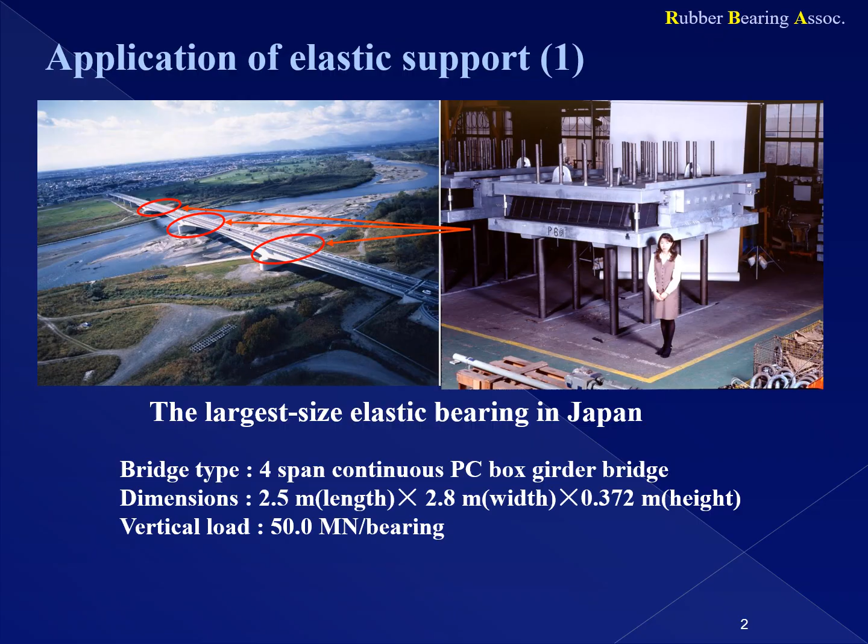This bridge is the type of 4-span continuous pre-stressed concrete box girder. This rubber bearing is classified as the largest in size, with a plane dimension of 2.5 meter by 2.8 meter, and a thickness of 372 mm. The vertical load is 50 MN per bearing.

This bridge is a type of 5-span continuous precast concrete box girder. The vertical load is about 11 MN per bearing.

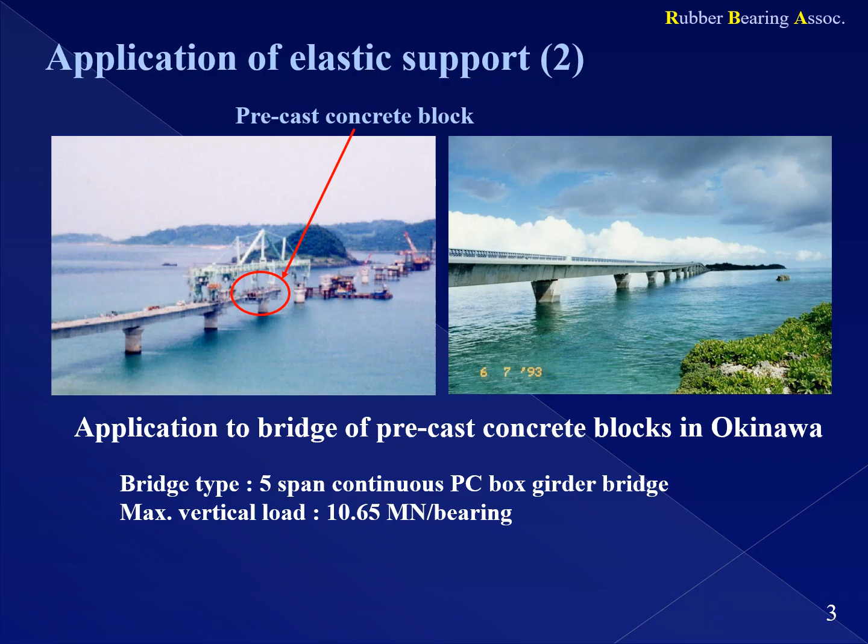This bridge is the type of 5-span continuous pre-stressed concrete box girder. The largest rubber bearing used in this bridge has a plane dimension of 1.5 meter by 1.5 meter, and a thickness of 360 mm. Vertical load is 21.4 MN per bearing.

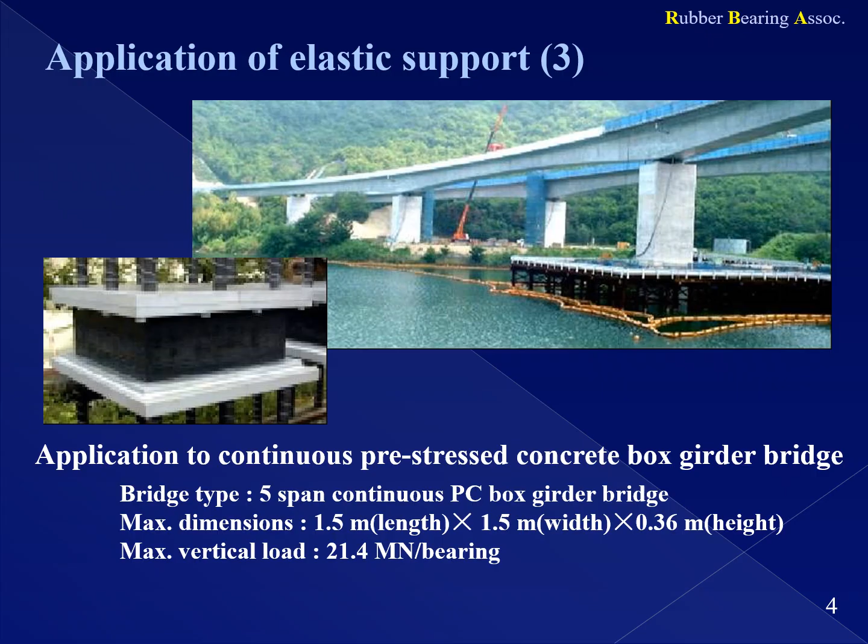This bridge is the type of 3-span continuous pre-stressed concrete box girder. The largest rubber bearings used in this bridge are used two bearings side by side as one bearing. The largest rubber bearing has a plane dimension of 1.5 meter and 1.0 meter and a thickness of 240 mm. Vertical load is about 20 MN per bearing.

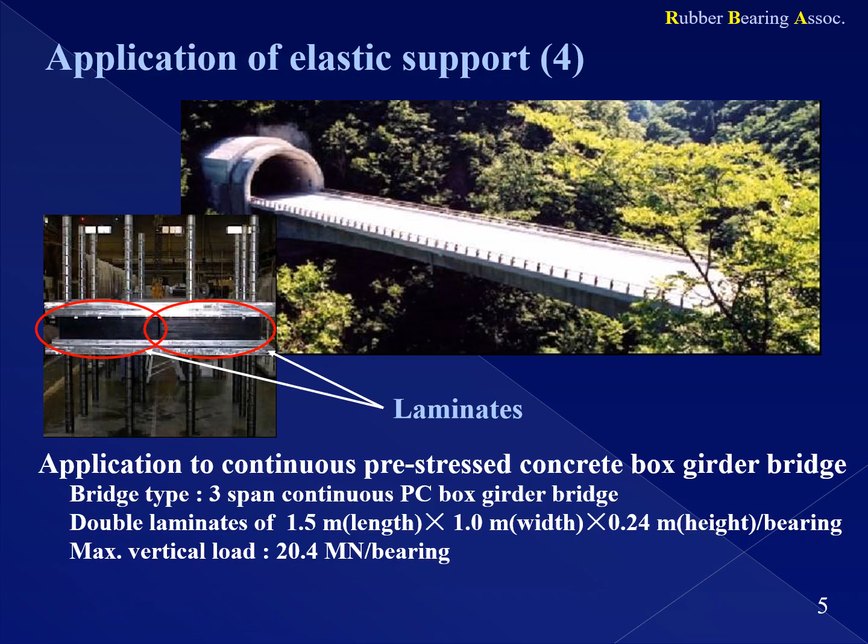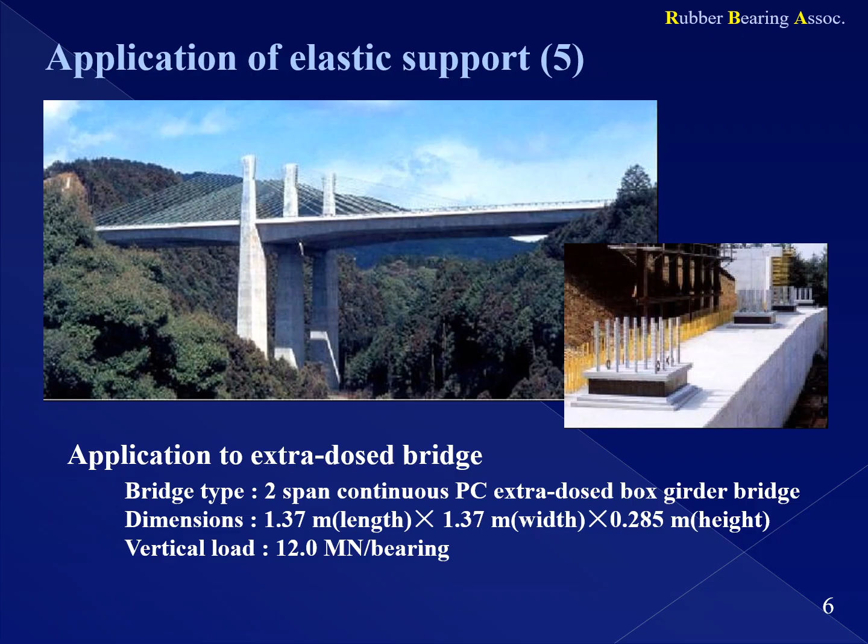This bridge is a type of 2-span continuous pre-stressed concrete extra-dosed box girder. The largest rubber bearing used in this bridge has a plane dimension of 1.37 meter by 1.37 meter, and a thickness of 285 mm. Vertical load is 12 MN per bearing.

This bridge is the type of 6-span continuous pre-stressed concrete box girder. This bridge is the first in Japan to use a seismic isolation bearing that uses high-damping rubber as the bearing material. The largest rubber bearing used in this bridge has a plane dimension of 0.9 meter by 1.5 meter, and a thickness of 270 mm. Vertical load is 7 MN per bearing.

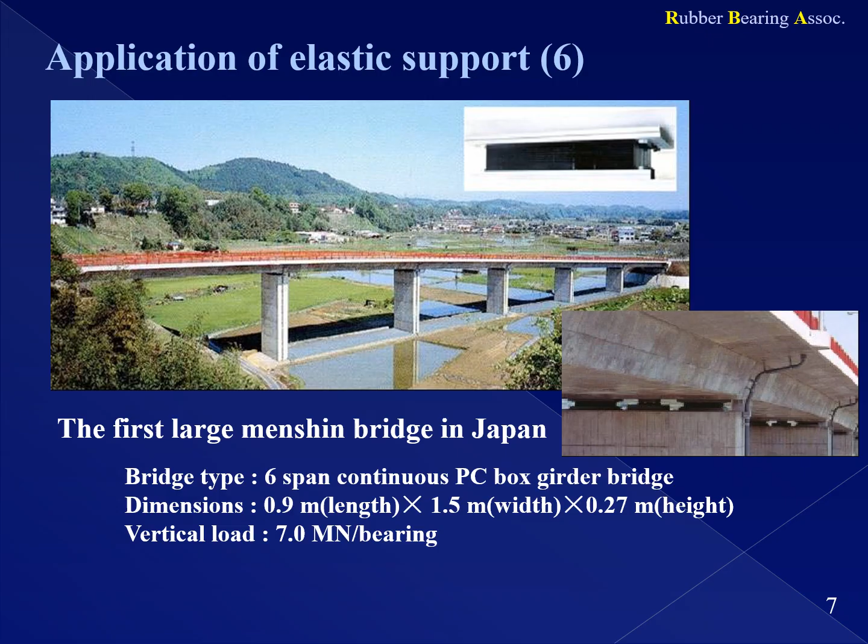This bridge is a 1-span steel arched bridge. The largest rubber bearing used in this bridge has a plane dimension of about 1 meter, and a thickness of 280 mm. Vertical load is about 8 MN per bearing.

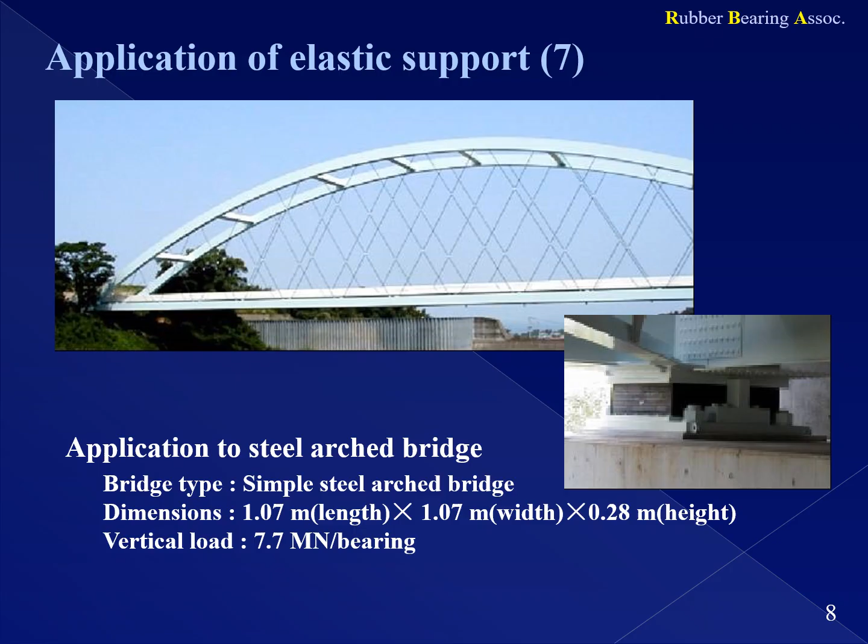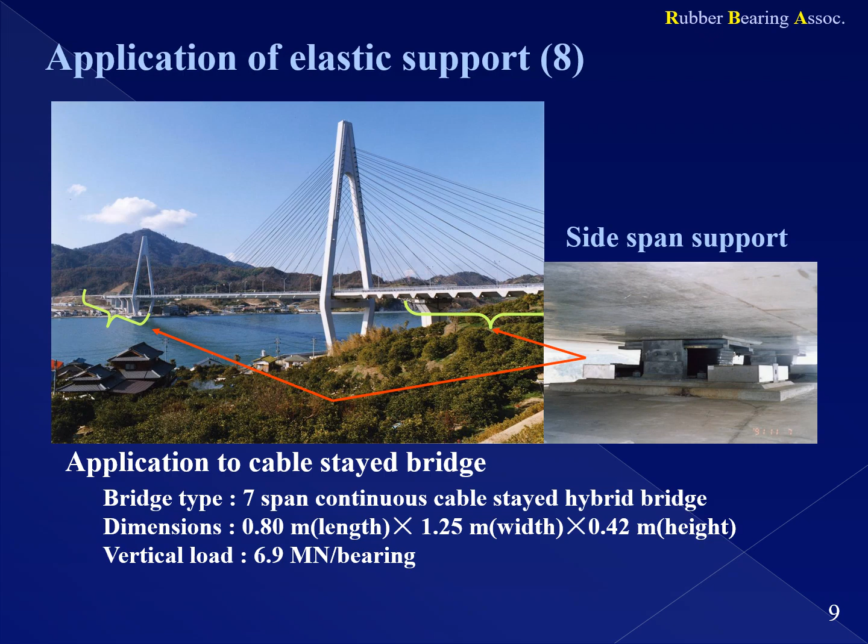This bridge is a type of 7-span continuous cable-stayed hybrid bridge. The largest rubber bearing used in this bridge has a plane dimension of about 0.8 meter by 1.25 meter, and a thickness of 420 mm. Vertical load is about 7 MN per bearing.

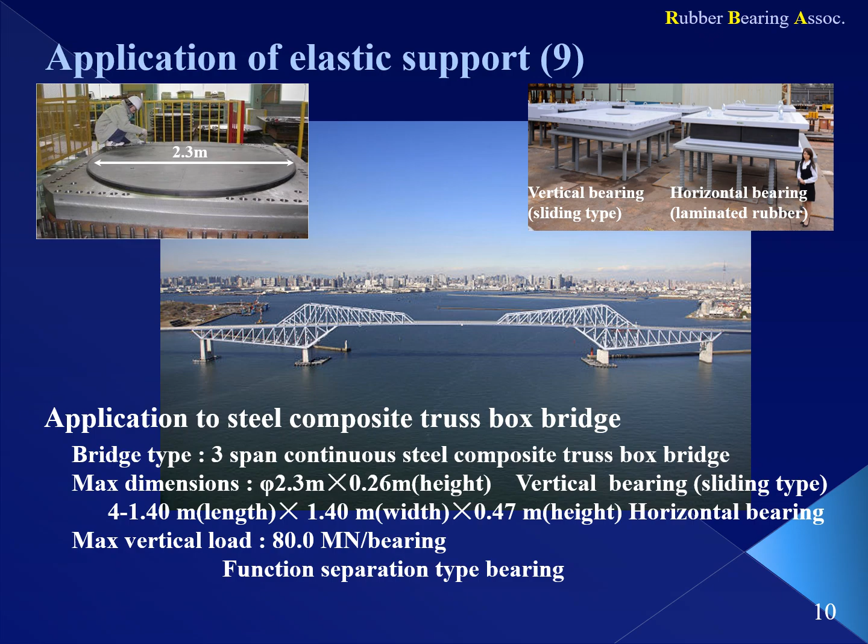In this article, we will show damage examples from earthquakes in Japan. Typical earthquakes that occurred in Japan include the Southern Hyōgo Prefecture earthquake in 1995, the Mid-Niigata Prefecture earthquake in 2004, the Niigata Prefecture Chuetsu offshore earthquake in 2007, the 2011 Pacific coast of Tohoku earthquake, and the 2016 Kumamoto earthquake.

This is a damaged example of a knuckle bearing portion from the Kobe earthquake. This knuckle bearing is a fixed bearing and corresponds to the rotation of the girder. The rotation feature became dysfunctional due to the loss of the pin support.

Due to the downward force caused by the earthquake, the girder's lower flange on the upper part of the bearing was damaged. The downward force due to the earthquake grew bigger from the rotation moment that occurred in the girder by the horizontal force of the bridge in the perpendicular direction. This downward force pushes the lower flange up and tears it down.

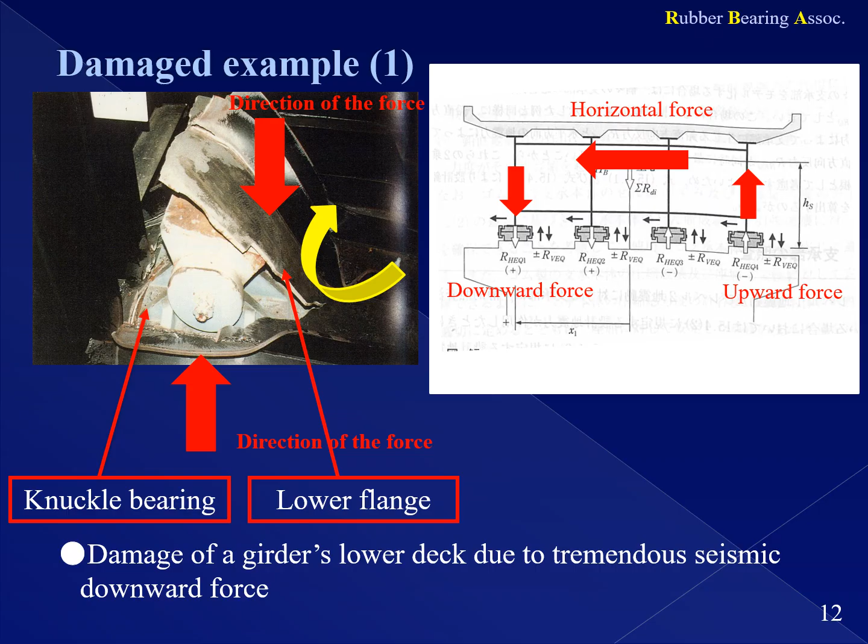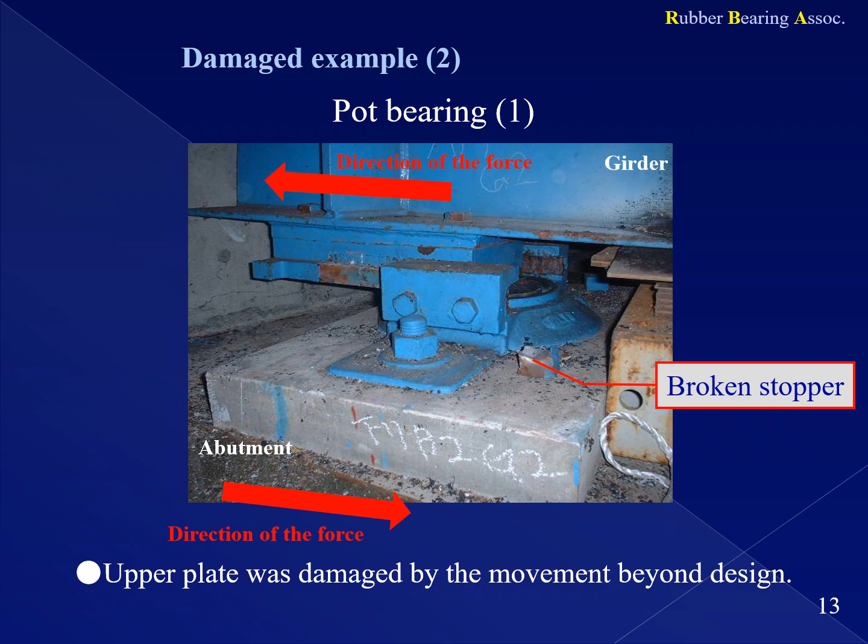This is a damaged example of the pot bearing. Horizontal force is generated by the earthquake, and the stopper portion was damaged by impact with the upper plate. You can see the parts supporting the vertical load deviate greatly. This is due to the occurrence of displacement and horizontal force exceeding the design limits.

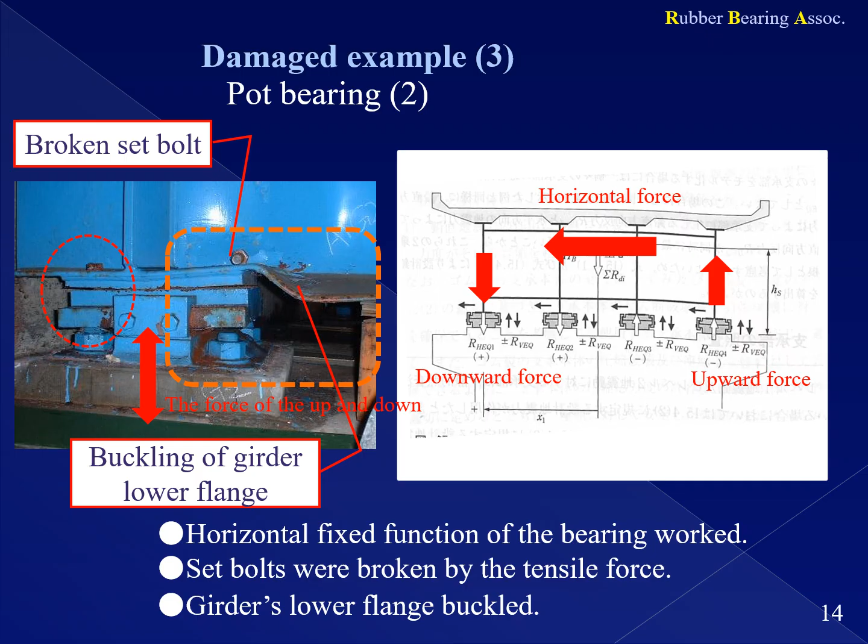Same as before, this is a damaged example of a pot bearing. This bearing is a fixed bearing. The bearing does not move because it is fixed with the side block and the upper plate stopper. However, the set bolt was damaged by the tensile force and the horizontal force. In addition, the girder's lower flange was buckled.

This is the damaged example of the knuckle roller's bearing. The pin came out of place due to a huge seismic force. The roller fell because the movement of the superstructure exceeded expectations due to the huge seismic force.

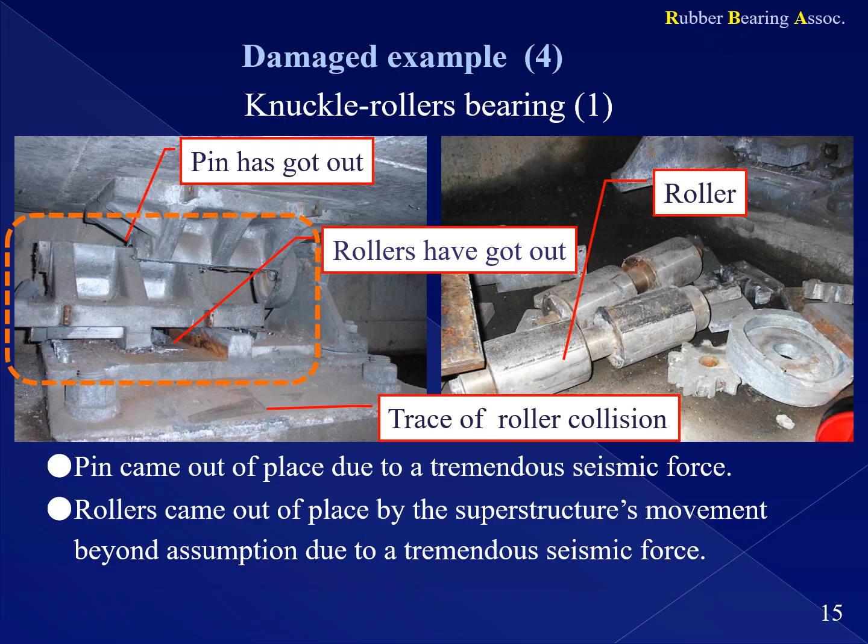Same as before, this is the damaged example of the knuckle roller bearing. Bolts were broken by the tensile force and sandwiched between the sole plate and upper plate.

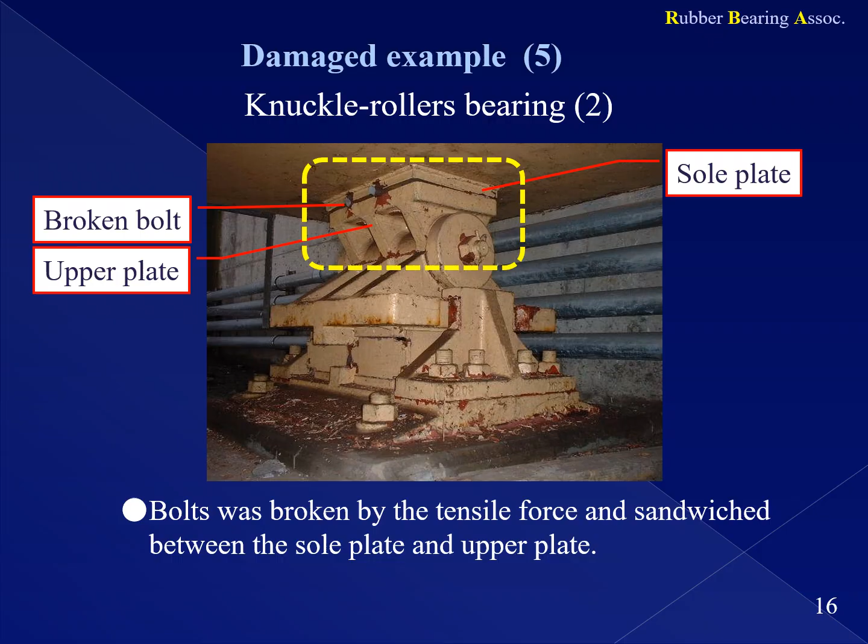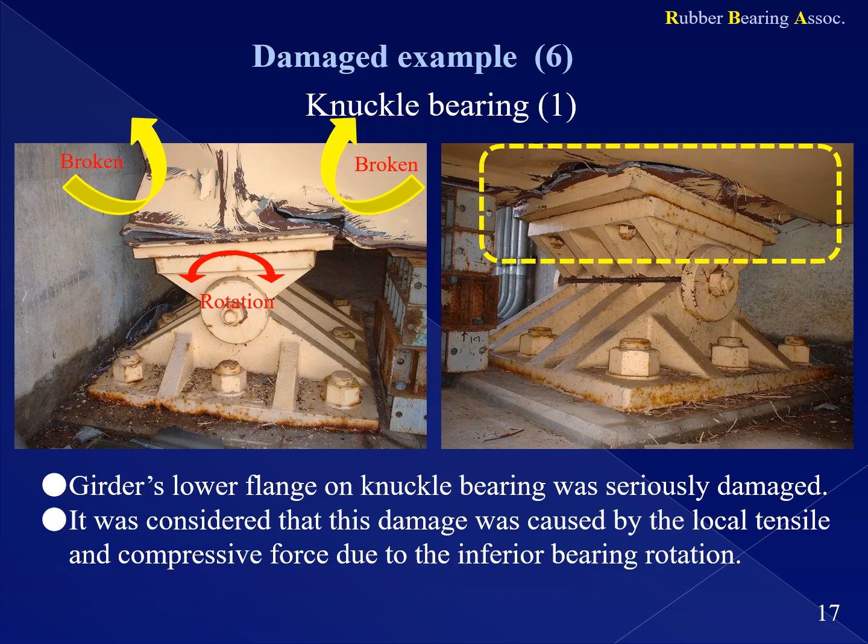Next, same as before, this is the damaged example of the knuckle bearing. The girder's lower flange on the knuckle bearing was seriously damaged. It was considered that this damage was caused by the local tensile and compressive force due to the inferior bearing rotation.

This is the damaged example of substructures with rubber bearings. This earthquake is the Chuetsu offshore earthquake. The abutment of the bridge has greatly shifted by the earthquake. As a result, the girder collided with the parapet. The parapet was damaged by the impact.

Rubber bearings were not damaged, but residual displacement remained in the rubber bearings because the substructure was greatly shifted. Rubber bearings are deformed about 150% of the rubber thickness. It has greatly exceeded the permissible value of the rubber bearing. Such a state is a very severe situation for the rubber bearing. Therefore, the rubber bearings were replaced.

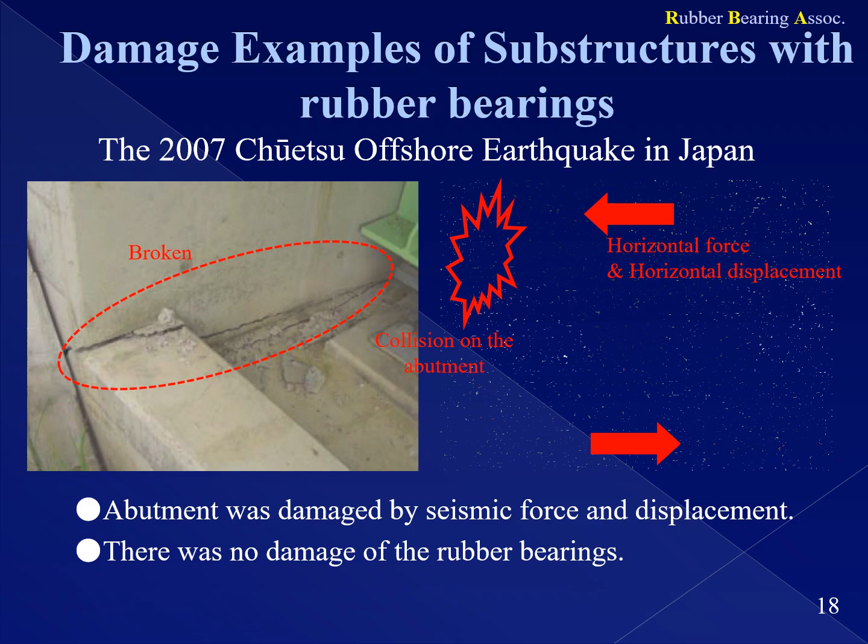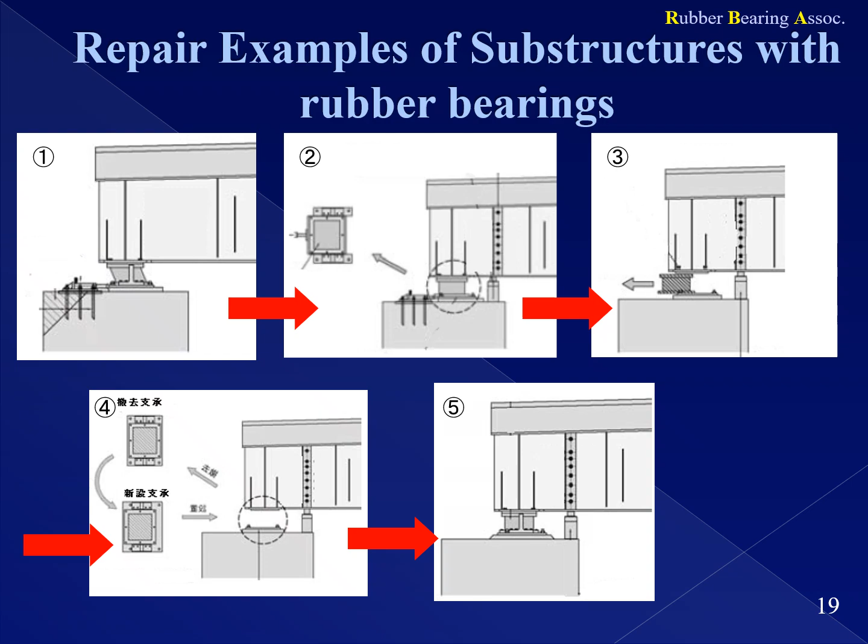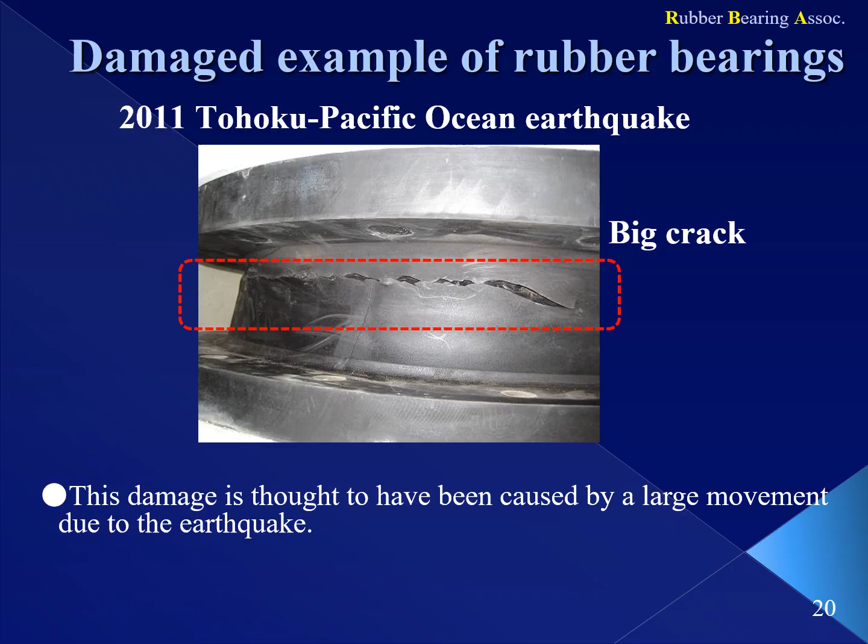This is a damaged example of the rubber bearing. This earthquake is the 2011 Tohoku Pacific Ocean earthquake. This damage is thought to have been caused by a large movement due to the earthquake. Because it was a partial break, it did not collapse.

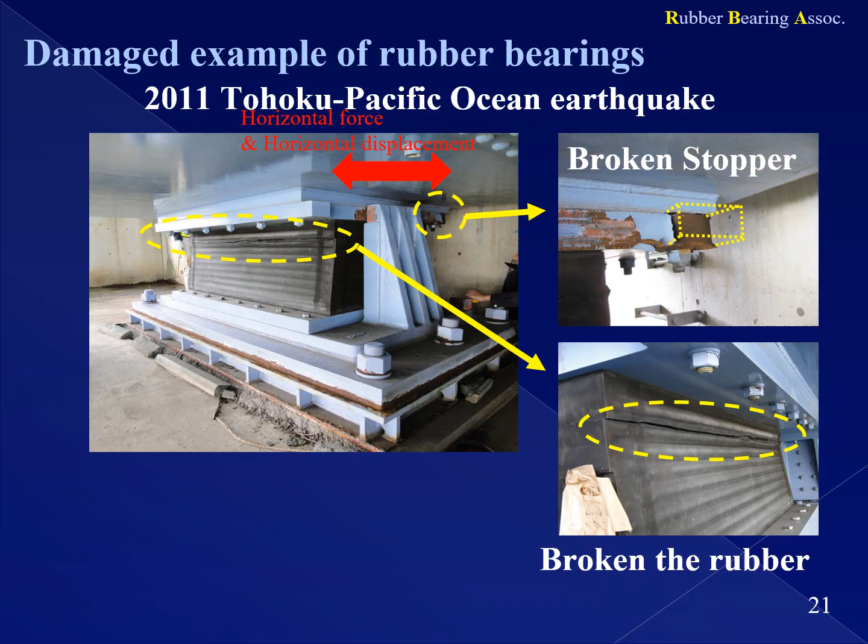This is also a damaged example of the rubber bearing. This earthquake is the 2011 Tohoku Pacific Ocean earthquake. Due to the large movement, the rubber bearing was damaged. In addition, the stopper of the upper plate was broken.

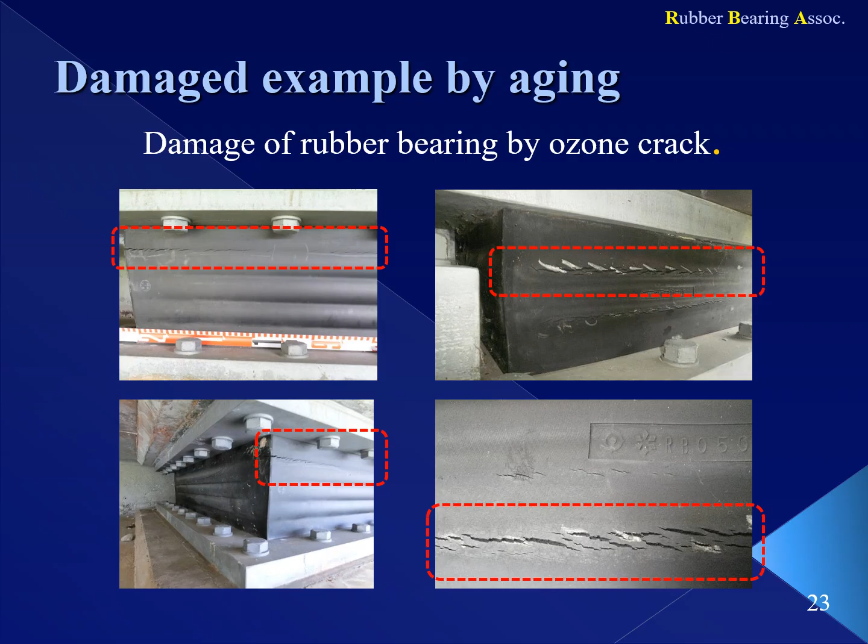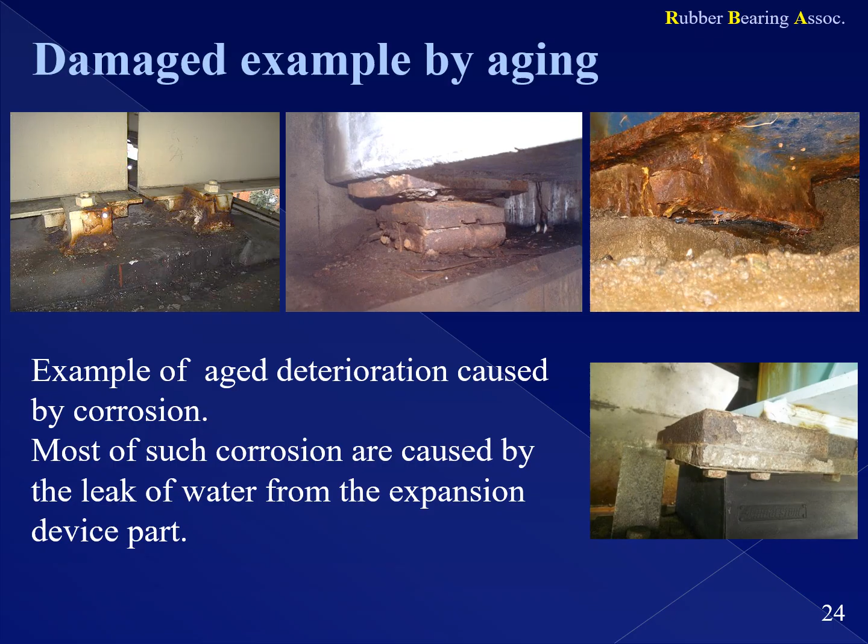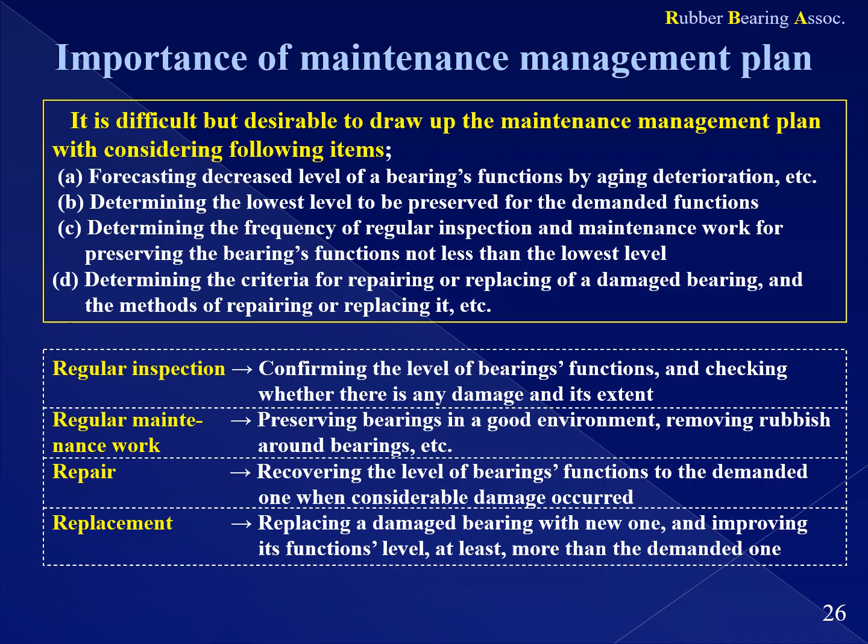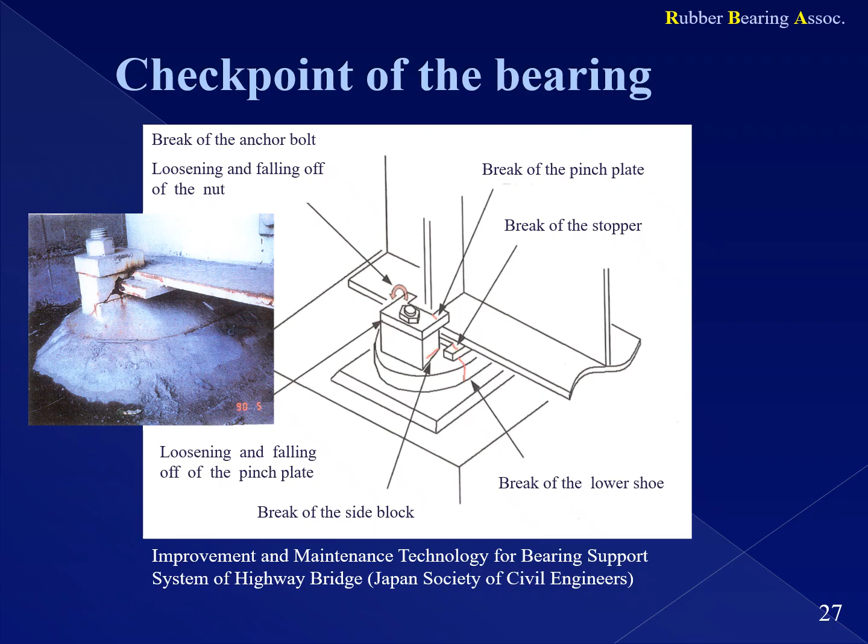This is a pot bearing, also made of steel materials. In this bearing, the stopper for limiting movement may break, or the pinch plate resisting upward force may deviate. This is because the bolt broke due to displacement more than designed, or upward force more than designed. In addition, it may have cracked at the lower shoe. Same as the line bearing, since these bearings had been made of material without toughness, it was easy to crack under concentrated load. In recent years, I hear it has been improved and modified to a toughness material.

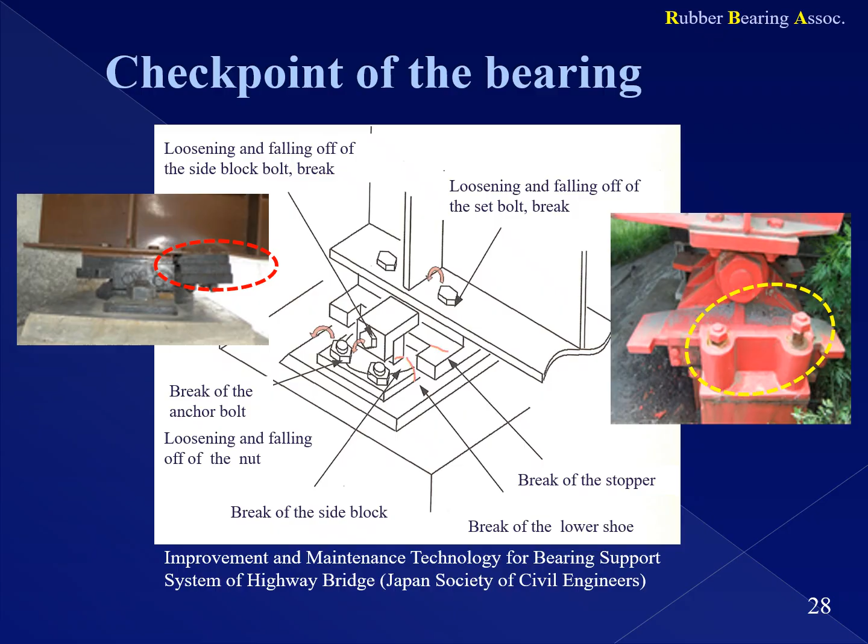This is a knuckle roller bearing. In this bearing we see falling out of the roller due to excessive displacement, wear of rollers due to cyclic displacement, falling off of the knuckle by rotational displacement, breaking of the mounting bolt of the side block, and breaking of the set bolt. Due to the high structure height, when the pin roller bearing is damaged, there is a possibility that a step will occur in the road surface.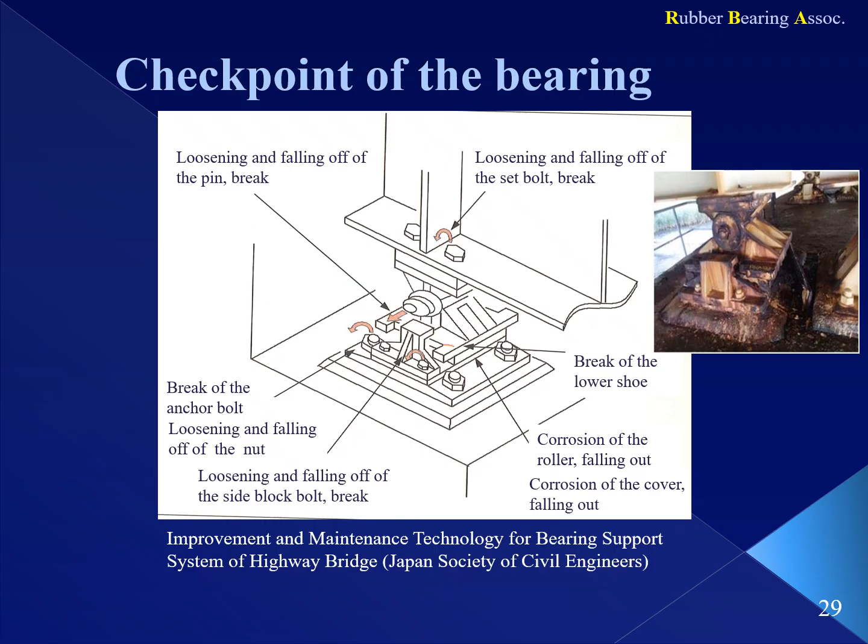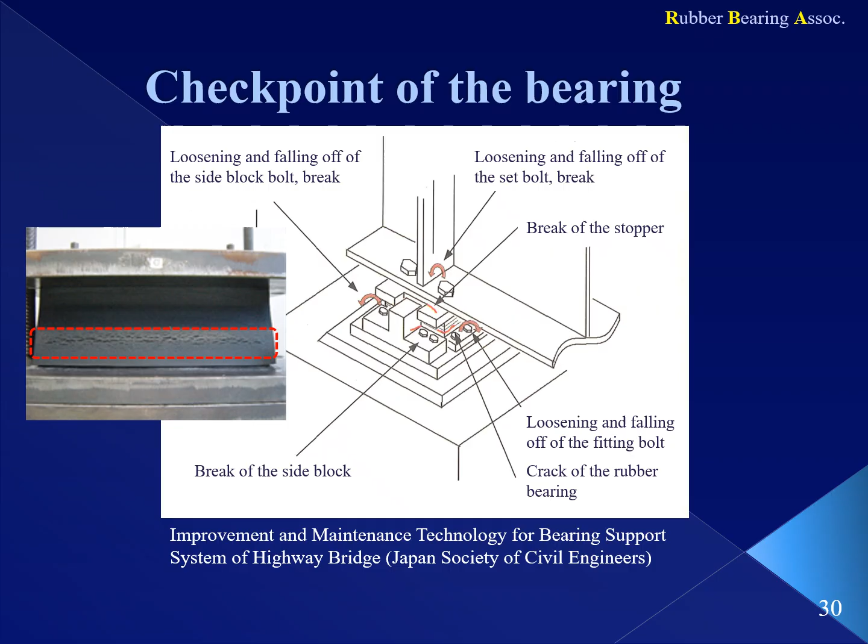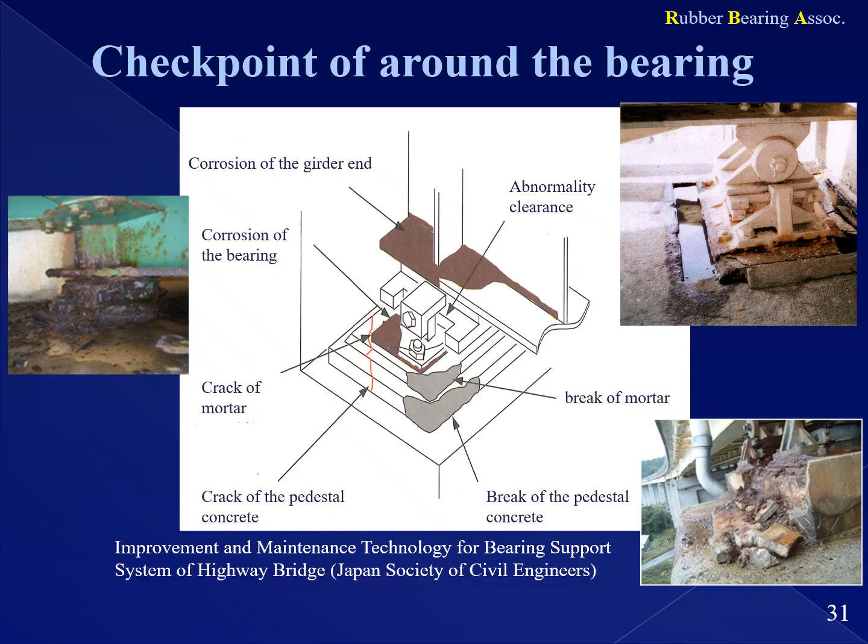In regular maintenance work, we clean along the bearing or remove earth and sand. This page shows the exchange of the bearing. On the right of the photograph is a knuckle bearing to be replaced.

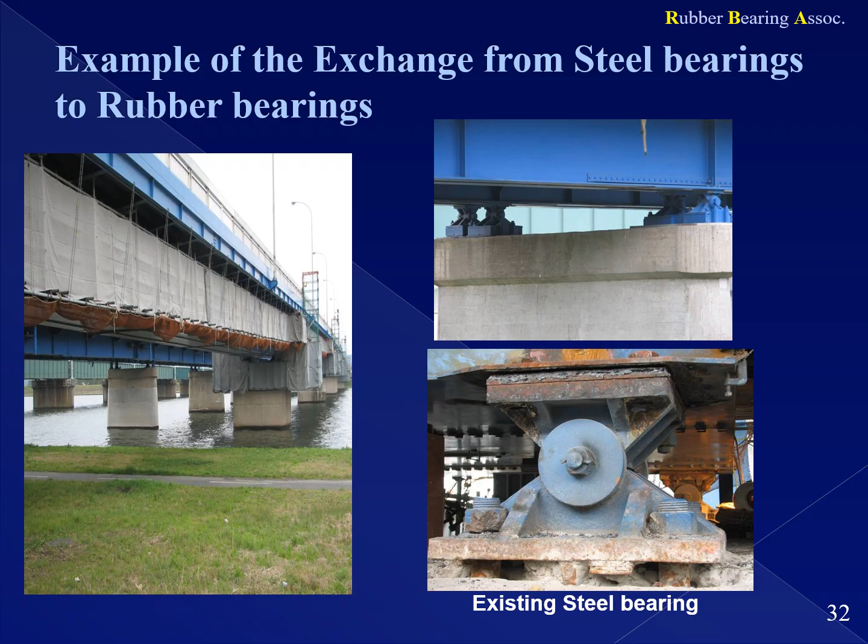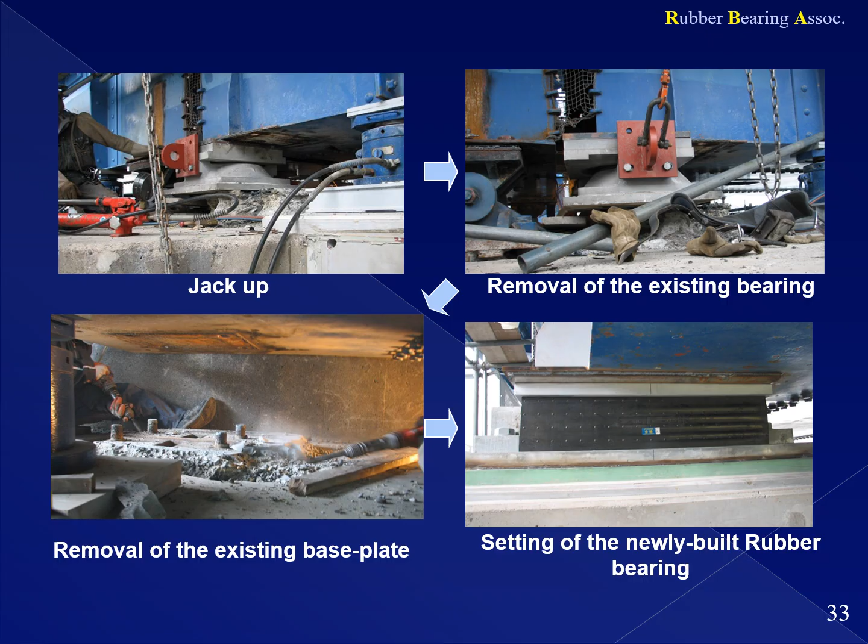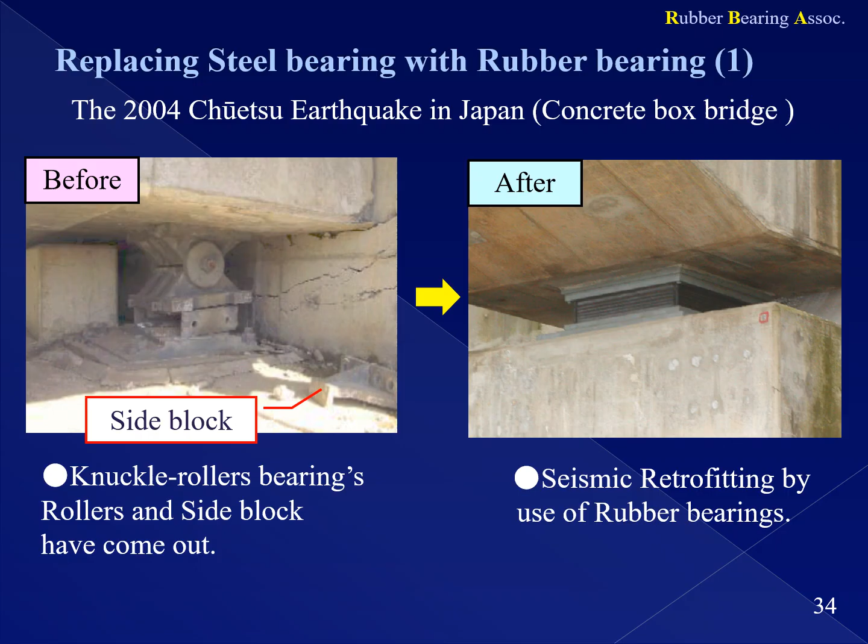This is the case of replacing the knuckle roller bearing with a rubber bearing. These two cases are easy to replace due to the high height of the existing bearing.

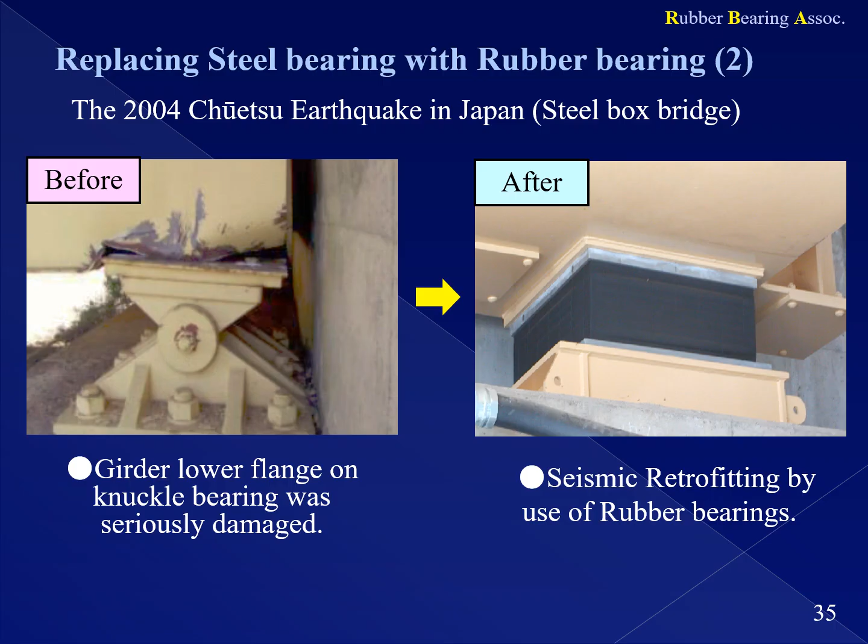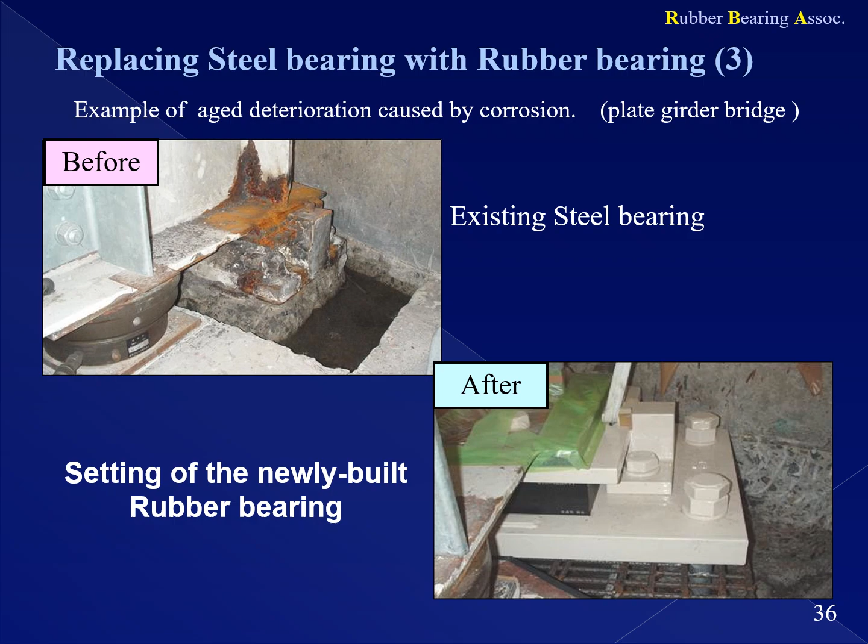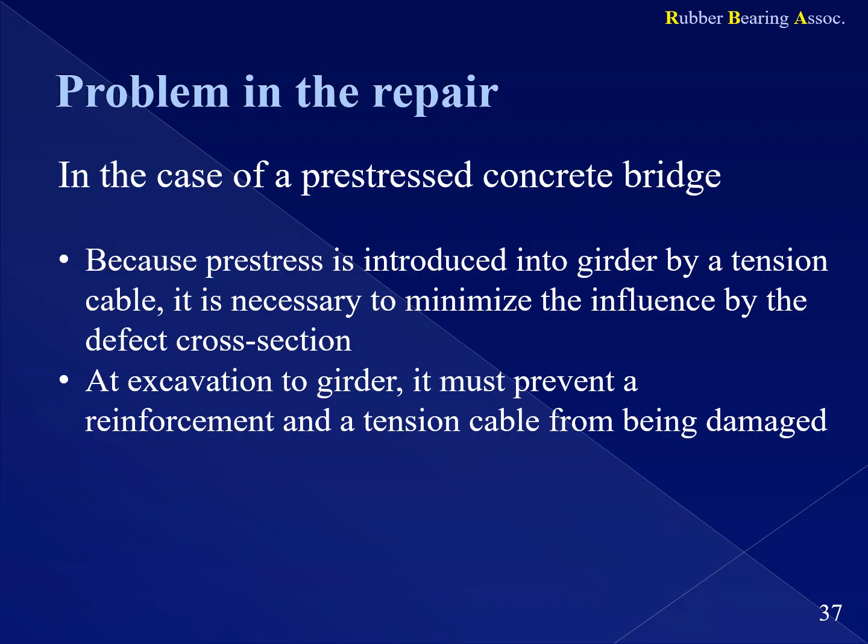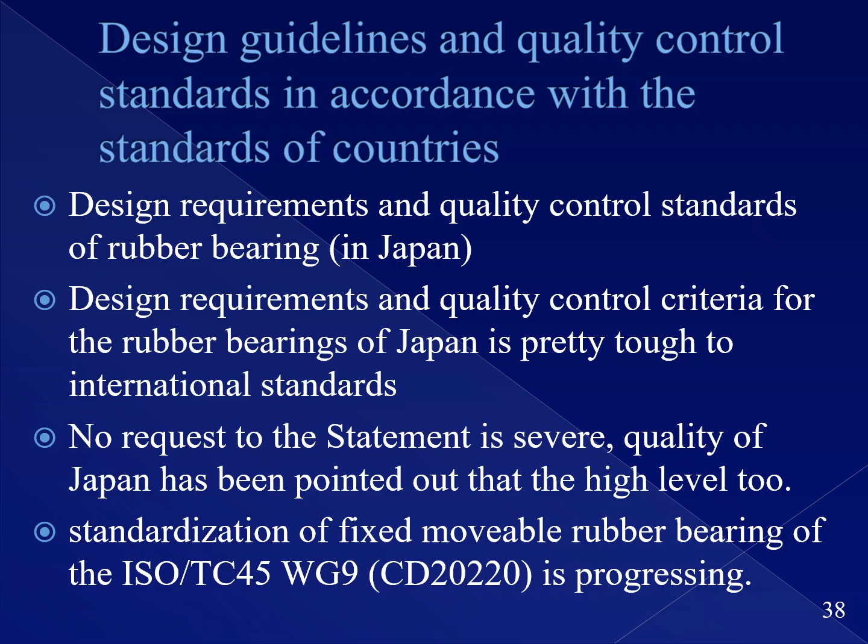Design requirements and quality control standards of rubber bearings in Japan are quite strict compared to international standards. It has been pointed out that the quality of Japan is too high, making the product price higher. Currently, it is progressing fixed and movable rubber bearing standardization supported by ISO Technical Committee 45 Working Group 9. Depending on the required performance of the bridge, a standard is being developed or proposed that can ensure both completion and economy.

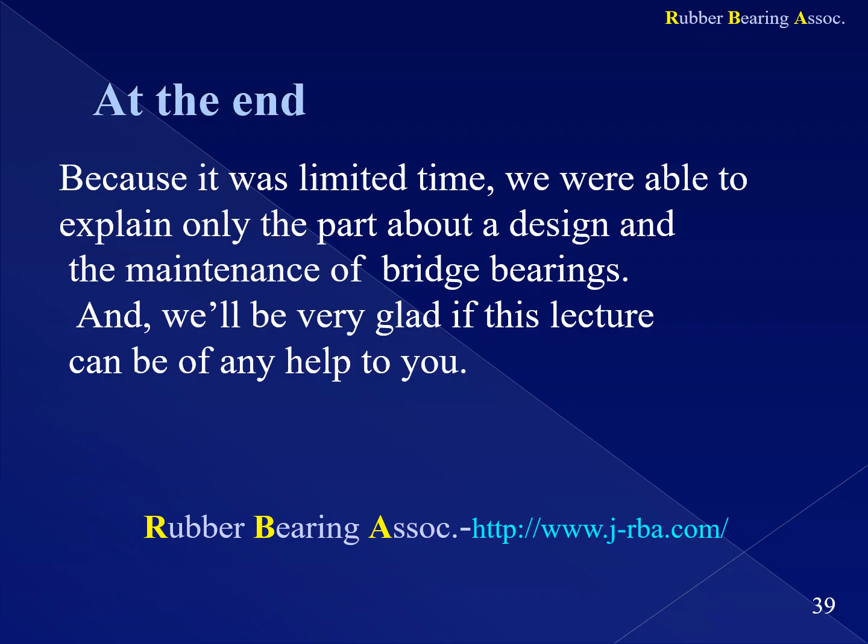At the end, because time was limited, we were only able to explain the part about our design and the maintenance of bridge bearings. We're very glad that this lecture will help you.